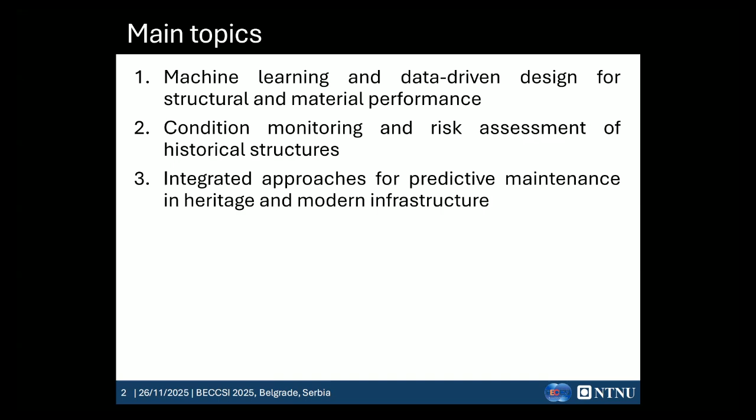Our mini symposium will run for 2 days. Today is from 11 to 1:30, and tomorrow we will have the same time slot from 11 to 1:30. The room of our mini symposium is always this one; I think it's the largest room. Each presentation will have approximately 15 minutes, roughly 12 minutes for the presentation and 3 minutes for questions.

But if you need more time, that's completely fine. Use the 15 minutes, because we can leave the discussions for our coffee break. As you see outside, there are quite hot discussions. So it's completely fine for us. In 2 days, we have approximately 20 presentations. So that's really a lot of submissions for this interesting symposium.

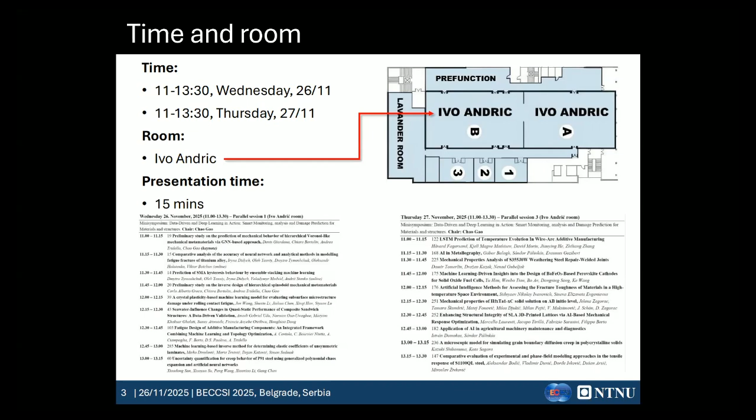Now, before we start, let me take several seconds to introduce our organizers. First, I want to introduce Professor Chiara Bertolin. She is a full professor at the Norwegian University of Science and Technology in Norway, and her main expertise is in non-destructive techniques for condition monitoring. She did a lot of work in climate risk assessment and climate-induced degradation models utilizing machine learning.

Our second organizer, Professor Chao, is from Harbin Institute of Technology, which is one of the top engineering-focused universities in China. He's also involved in the Shandong Provincial high-level talent program, and is the director of the Marine Steel Structure branch of the China Steel Construction Society. His research areas are polar structures, fatigue analysis, and sea-based rocket launch utilizing machine learning techniques.

Finally, I want to introduce myself. I'm an associate professor at NTNU and also the chair of the ESI CTC19 technical committee. My main expertise is in bioinspired design and deep learning networks. I did a lot of work utilizing deep learning as a core tool to investigate mechanical problems and to study the inverse design of high performance materials.

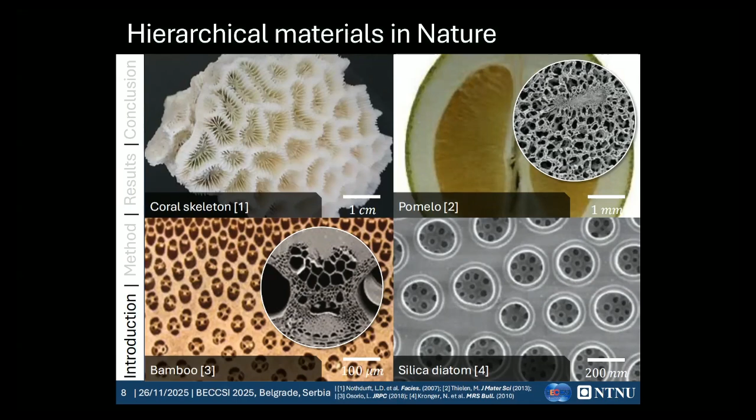As we all know, hierarchical materials are quite popular in nature and across many scales. From centimeters to millimeters and down to nanometers, we find these hierarchical designs. Currently, most studies work on regular hierarchical designs, which have been extensively studied to demonstrate their great advantages. Here, this work utilizes hierarchical designs to control the Poisson's ratio from positive to negative in order to have better energy absorption capabilities.

But it's observed that natural materials normally have irregular hierarchical designs. Therefore, there is a knowledge gap here. In order to address this gap, the goal of this preliminary study is: can we build hierarchical designs with finite irregularities and predict their mechanical behaviors?

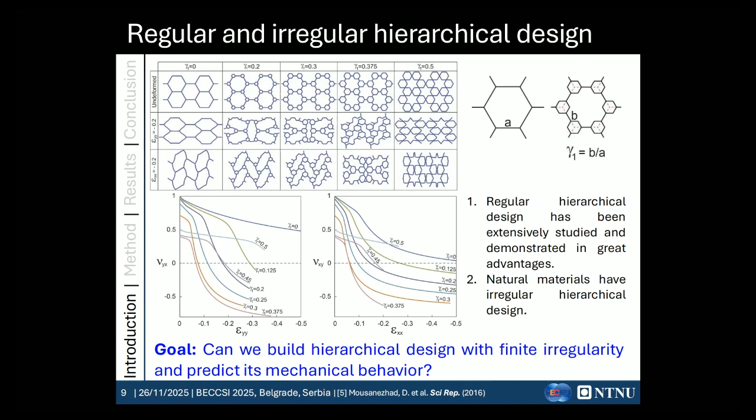So let's look at this slide, which shows our methodology. At the beginning, we generate the hierarchical designs with finite disorder. Then simultaneously, we perform finite element analysis in order to get enough data to feed into the graph neural networks.

We try to analyze these hierarchical designs with the disorderliness indices we defined, which are very important for the training or the design of the graph neural networks. After that, we design or customize the graph neural networks. Finally, we predict the mechanical behaviors of these complicated structures.

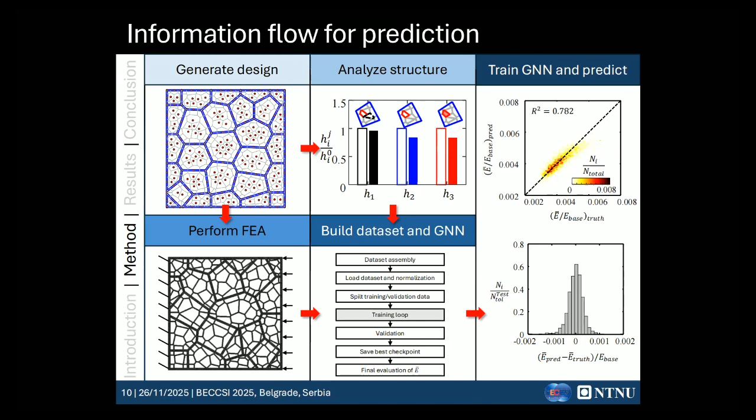This is how we consider these problems. Now let's look at the first step, how we generate irregular Voronoi designs. The main steps include three.

First, we produce irregular Voronoi cells by using random seed distributions, as you see here at iteration zero. Then we regularize these irregular designs using Lloyd's algorithm progressively. After that, we evaluate the geometrical irregularities by calculating the disorder indices we designed.

On the right side, this is a representative evolution of the iterations, starting from iteration zero to iteration 200. What we can visually observe is that at the final stage, the Voronoi diagrams become much more regular than at the initial stage. So the method has already been demonstrated successfully to achieve this.

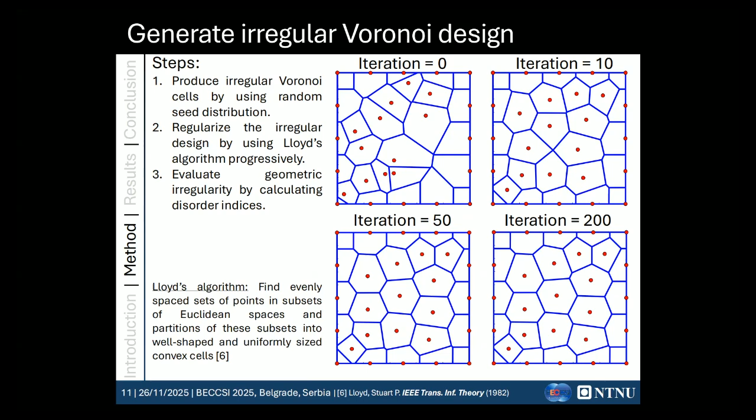The next question is how we evaluate this disorderness. Here, I want to show you the three indices we defined to evaluate this disorderness. H1 is the index which evaluates the disorderness in the edges of the cells.

For example, the red ones have 4 edges, the black ones have 7 edges. This is the content of H1 evaluated.

For H2, it evaluates the perimeter diversities or disorderness of the different cells. And H3 evaluates the area disorderness.

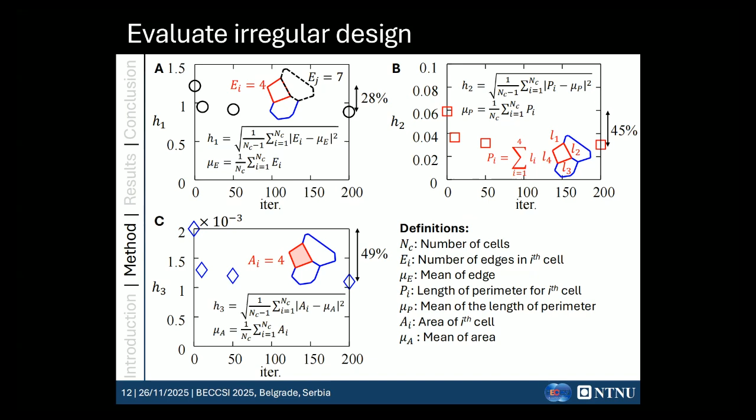So for H1, H2, and H3, by looking at all these figures after 200 iterations, all indices have been largely reduced in disorderness. This demonstrates that our method actually works quantitatively, not only qualitatively through visual observations. These indices would later be very important for building the graph neural networks.

Now let's look at the next step: we want to generate irregular hierarchical designs. Similar to the first order, but here in the second order, we have to add the constraint of minimum distance to ensure uniform distribution of the seed points at the second level. That's the additional step we need to introduce when working with hierarchical designs.

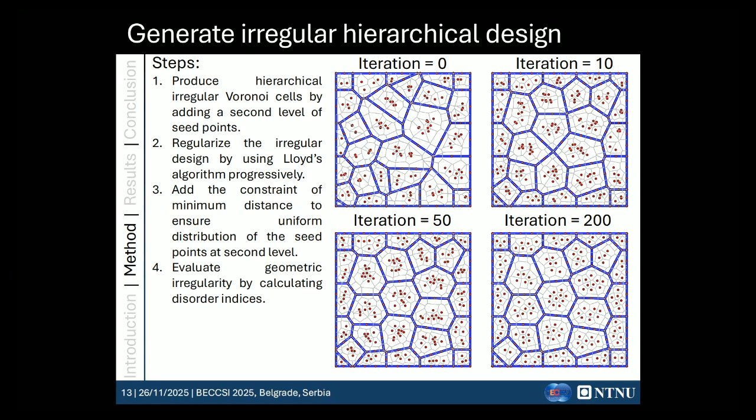Here you can see from the initial iteration equal to zero and the iteration equal to 200, that the cells—not only the first order but the second order as well—become more and more regular by utilizing the current method.

We also perform evaluations of the disorderliness. We always compare the final step, j equal to 200 iterations, to the initial iteration to see the difference. The hollow rectangular bars represent the initial stage in the first and second orders, and the solid bars represent the final stage. Interestingly, for both orders, the disorderliness indices have been reduced.

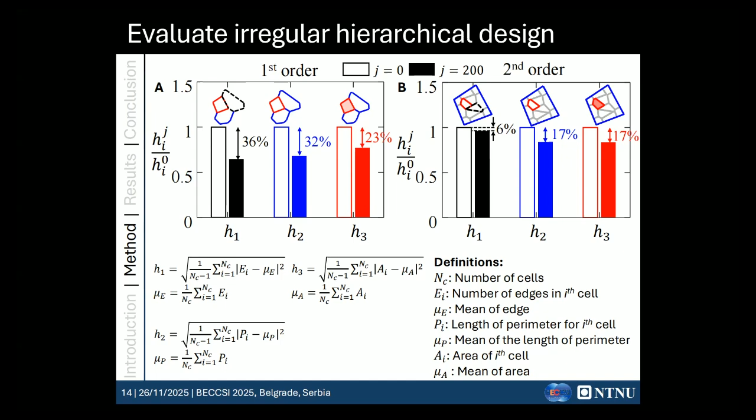For all three indices, especially for the first order, the indices reduced significantly. For the second order, we can see it decreased, but not as much as the first order. This could be understood because for the second order, the topology is constrained by the external cells. For example, in H1, it decreased only 6%. For the others, it still decreased, but not as much as the first order. That's the fundamental understanding of the difference in these numbers.

After that, we understand the geometries. Now we use finite element analysis to perform the FE modeling. We use Abaqus to perform the analysis, and for material we assume very simple models: isotropic and homogeneous, with a linear elastic constitutive law. Young's modulus was assumed to be 1 gigapascal, Poisson's ratio is 0.3. The element type used here is the plane strain element.

Looking at the right side, these are the modeling details. We ensure that through the thickness of the walls, at least 4 elements were built in order to get good accuracy of results. The left edge is fixed, and on the right edge we applied compression. Finally, we get the stress-strain curves, and to post-process the data, we extract the slope of these stress-strain curves to obtain the effective stiffness of these curves.

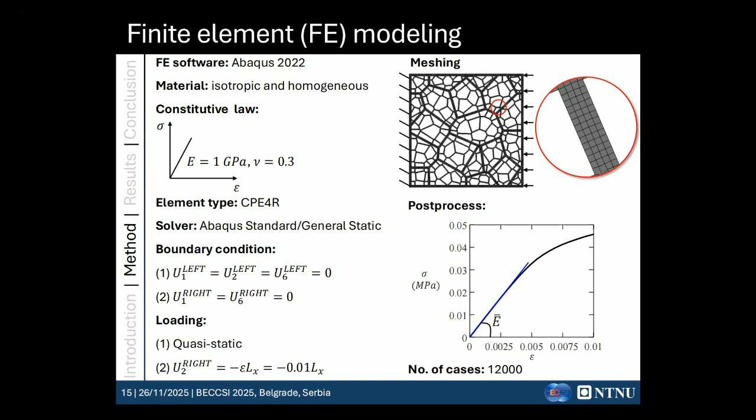We performed almost 12,000 cases for future deep learning studies. Now, looking at our graphs, we utilized MATLAB 2024 to build our graph neural networks instead of the very popular PyTorch or TensorFlow, because we want to customize everything by ourselves.

The most important thing here is the mapping between the design and the graphs. All the nodes of the graphs represent the intersection points or joints in the Voronoi lattice. Edges represent the structure connections between the nodes. Edge features include the thickness of the structure connections, and the global feature encodes the overall geometric metrics.

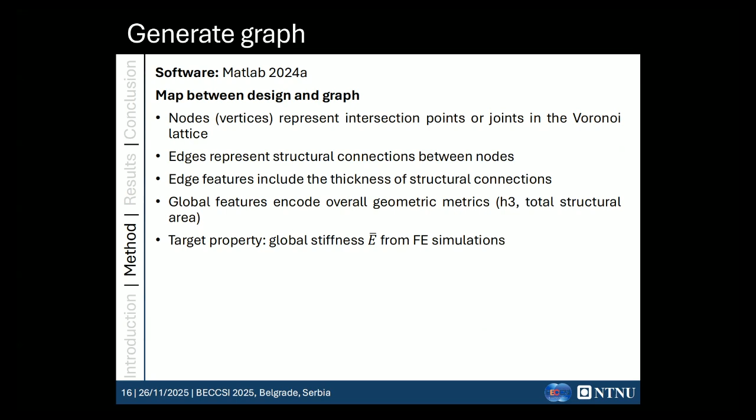H3 was included for the total structure areas. The target properties are the global stiffness, which we obtained from the finite element simulations.

Now we've introduced everything about our methodology. Let's look at our results. First of all, this is the result showing how the hierarchical Voronoi designs look.

Looking at the first row, this is the first order. These are the results as functions of H2-H1 and H2-H3.

The second row shows the second orders. What we can conclude is that the diversity of our Voronoi designs is good enough. For H1, it spans from 0.6 to 1.8. For H2, it's from 0.1 to 0.3. And H3 also has quite a large range, from 0.01 to 0.05.

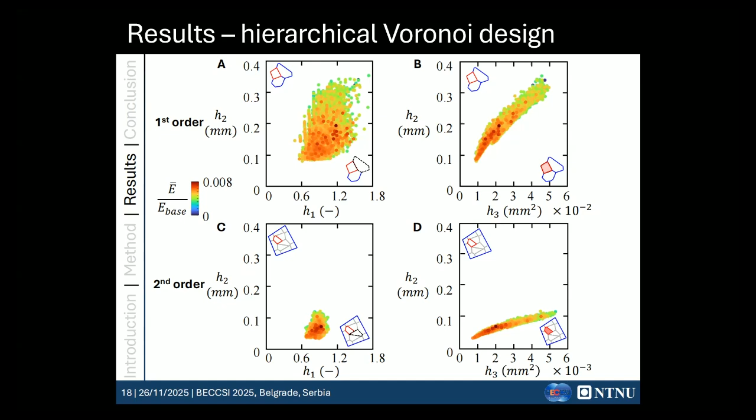In the second order, the diversity is not as huge as the first order. The reason, as I explained before, is because we receive constraints from the external first order, H, which restricts the disorderliness and its change. H3 can still achieve quite a wide range, but H1 and H2 are not as big as the first orders.